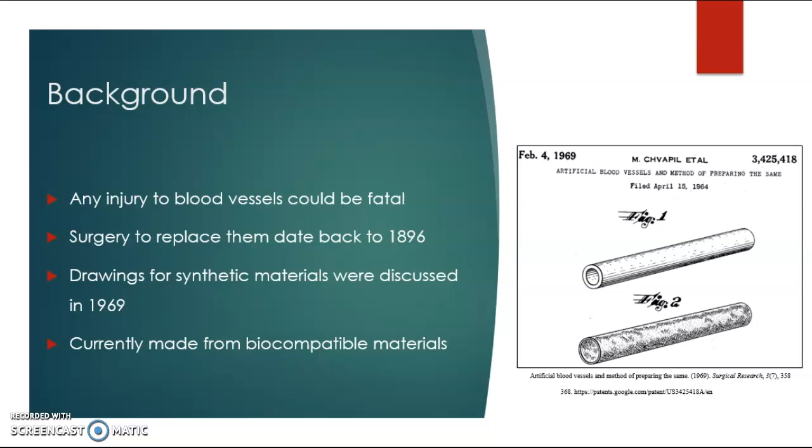Using synthetic materials for blood vessels has been a great medical breakthrough because they are easily cleaned, stored, and have the ability to have antibiotics put into them. In order to replace a blood vessel, the material must be strong, cost-effective, the correct size, and manufactured from a biocompatible material. The carotid arteries are two primary arteries and can be found in the neck.

The average carotid artery diameter for an adult male is 7 millimeters and has a blood flow rate of 5,100 millimeters cubed per second. This artery was chosen because it is one of the largest. Research revealed that replacement blood vessels with a diameter greater than 6 millimeters typically last a longer time. Outside pressure against the carotid artery was determined to be 6.67 times 10 to the negative 3 megapascals.

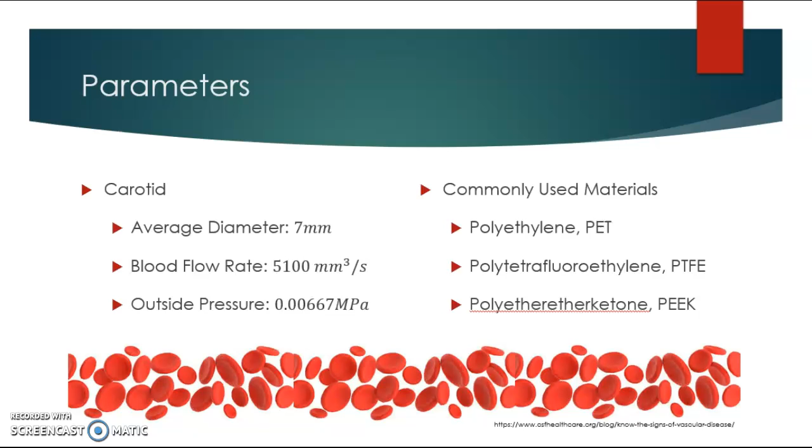Since the beginning of artificial blood vessels, both PET and PTFE have been the top two choices. A third possible material for artificial blood vessels is polyether ether ketone, PEEK.

In order to determine the best possible material, three sizes of arteries needed to be created. The first had a length of 1 millimeter, the second 10 millimeters, and the third 100 millimeters. This is to make sure that the chosen material can work for a replacement of any size. The inner and outer diameter match that of the carotid artery with an inner diameter of 5 millimeters and an outer diameter of 7 millimeters.

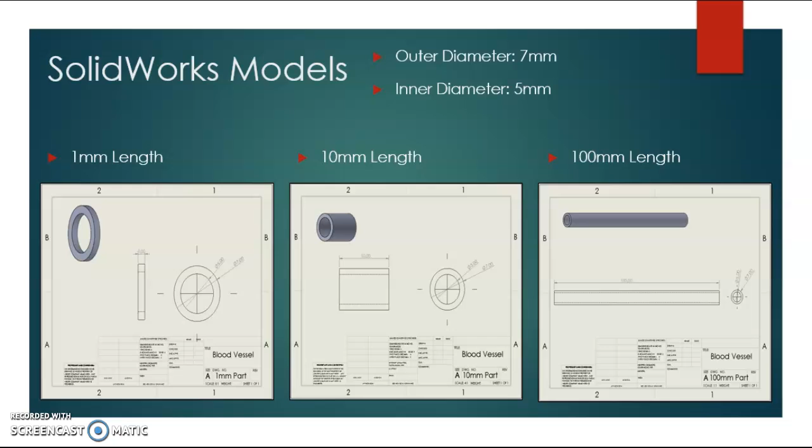Each of the three blood vessels underwent a flow simulation. The flow simulation was based on an extreme flow rate of 5 times the normal flow rate. This is to allow for any error in calculation as well as any change in the flow rate of the blood in the person with a replaced vessel. It was determined that the material does not influence flow rate. Because these are simple models, we are not concerned with any friction, but rather just the true nature of blood.

The blood flow rate used was 25,000 millimeters cubed per second. Environmental pressure of 0.101325 megapascals was applied to the opposite side of the blood vessel. The maximum pressure felt on each model was 0.101365 megapascals for the 1 millimeter, 0.101348 megapascals for the 10 millimeter, and 0.102147 megapascals for the 100 millimeter.

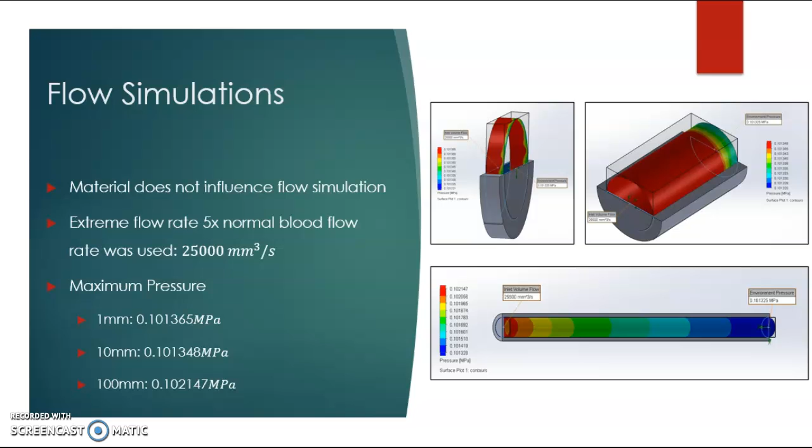Through the recorded maximum pressures, force simulations were able to be created for each model. These pressures correspond to the maximum pressure that is expected to be exerted on the inside of each individual blood vessel. On the outside of each blood vessel, a pressure of 6.67 times 10 to the negative 3 megapascals was applied, as researched. Fixtures were applied on the ends of each vessel to exemplify that the synthetic vessel would be attached to the real blood vessel.

Results from each simulation demonstrated how much stress and strain each piece undergoes with the same forces, but specific materials and sizes. For a 1 millimeter blood vessel made from PET, the maximum stress was 0.1975 megapascals, and the maximum strain was 3.695 times 10 to the negative 5.

This force simulation was then run on the 10 millimeter blood vessel. For a 10 millimeter blood vessel made from PET, the maximum stress was 0.4237 megapascals, and the maximum strain was 1.012 times 10 to the negative 4.

This same simulation was then run on the 100 millimeter blood vessel. For a 100 millimeter blood vessel made from PET, the maximum stress was 0.3809 megapascals, and the maximum strain was 9.621 times 10 to the negative 5. These same simulations were then run on both the PTFE material and the PEEK.

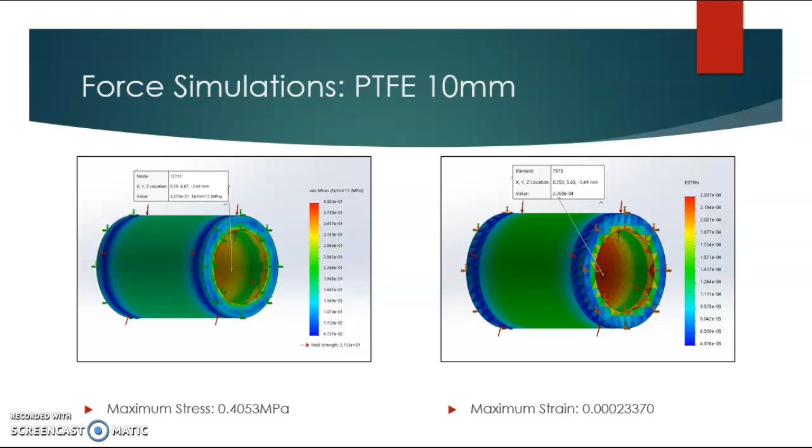For a 1 millimeter blood vessel made from PTFE, the maximum stress was 0.1736 megapascals, and the maximum strain was 7.891 times 10 to the negative 5. For a 10 millimeter blood vessel made from PTFE, the maximum stress was 0.4053 megapascals, and the maximum strain was 2.337 times 10 to the negative 4.

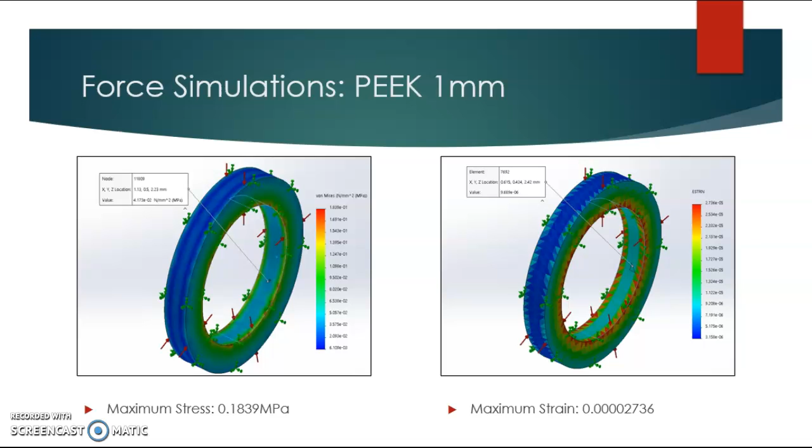For a 100 millimeter blood vessel made from PTFE, the maximum stress was 0.3740 megapascals, and the maximum strain was 2.229 times 10 to the negative 4. For a 1 millimeter blood vessel made from PEEK, the maximum stress was 0.1839 megapascals, and the maximum strain was 2.736 times 10 to the negative 5.

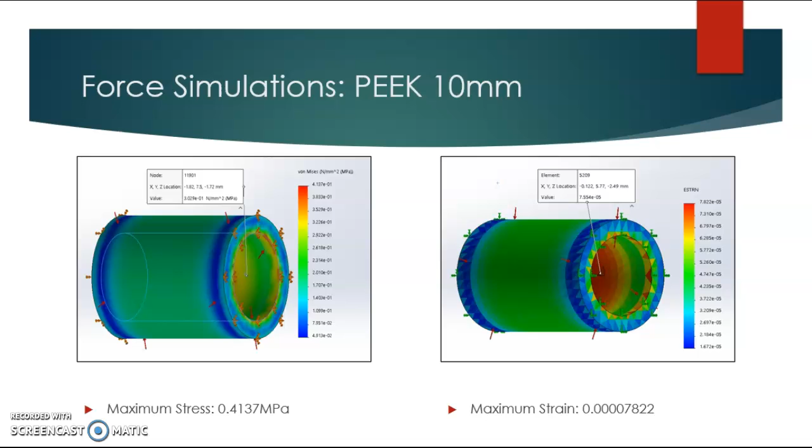For a 10 millimeter blood vessel made from PEEK, the maximum stress exerted upon it was 0.4137 megapascals, and the maximum strain was 7.822 times 10 to the negative 5. For a 100 millimeter blood vessel made from PEEK, the maximum stress was 0.3752 megapascals, and the maximum strain was 7.449 times 10 to the negative 5.

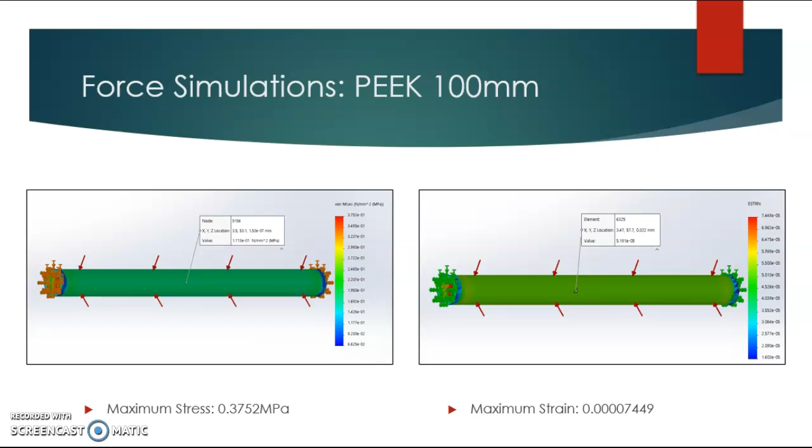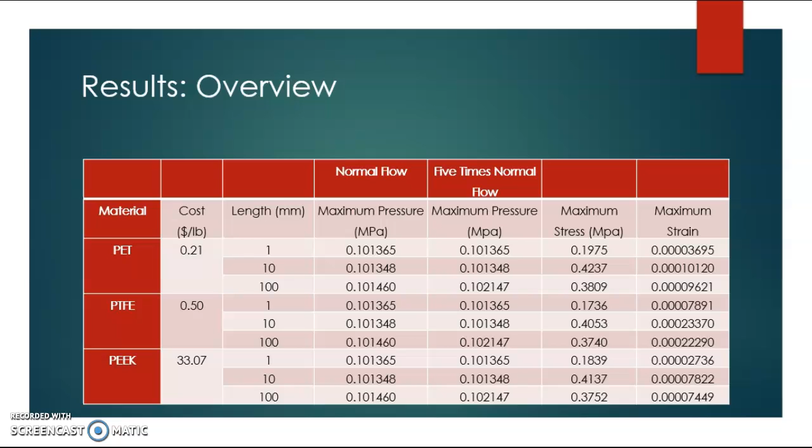These results are laid out in this simple table here. This table shows the cost and performance in order to choose the best possible material for a replacement blood vessel. Observations from the table show that, though each material greatly differs in cost, they didn't appear to differ greatly in performance. It was expected that PEEK would have a greater performance than the PET and PTFE because it costs 157 times more than PET and 66 times more than PTFE.

This graph shows a direct comparison between the material's stress performance and the length of the model. The graph shows that the three materials all correlated in maximum stress felt. PET performed the worst of the three materials, PTFE performed the best. However, the percent difference between PET and PTFE was relatively low. The greatest difference between the 2 points happened for the 1 millimeter vessel and has a percent difference of 12.88%.

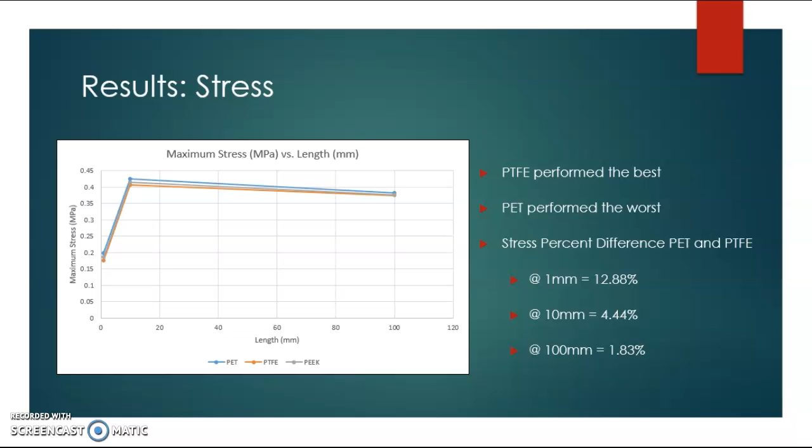This graph shows a direct comparison between the material's strain performance and the length of the model. The graph also shows that the three materials correlate trend-wise in the maximum strain felt on each artificial blood vessel, but at a largely different magnitude. PTFE performed the worst of the three materials. PEEK performed the best, but the PEEK difference was only slightly different than the PET. The greatest difference between PET and PEEK happened for the 1 millimeter vessel and has a percent difference of 29.82%, as shown.

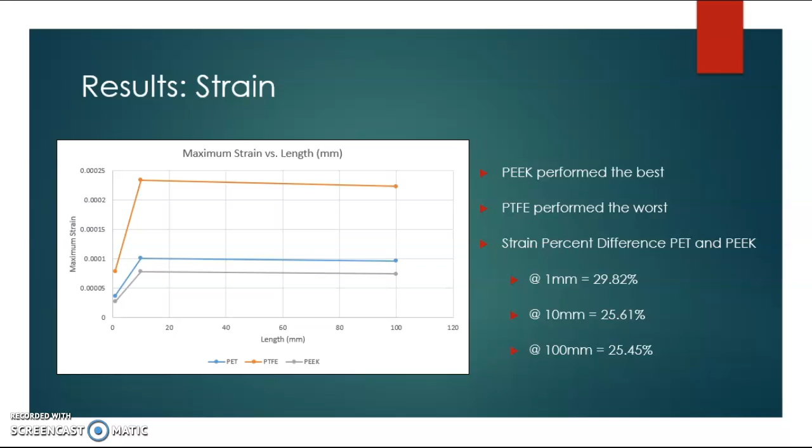The PEEK performed close to the PET in the stress simulation and the best in the strain simulations. However, the large cost difference of PEEK led to it being discarded and not chosen for the artificial blood vessel material. The cost difference between PET and PEEK was determined to be a markup of 197.48%. Therefore, PET is the best material for an artificial blood vessel.